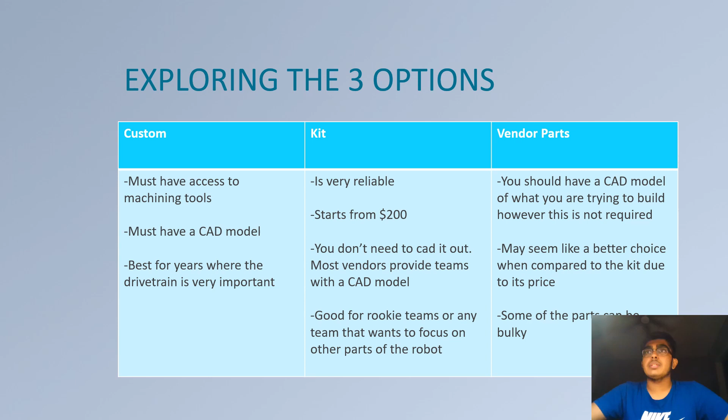So again, it depends on the game and it depends on your team strategy. If you want your robot to move in every single direction, mecanums or omni wheels are the way to go. Because with mecanum wheels, if you have one motor per wheel, you can control how the wheels rotate, and since they have the 45-degree rollers on the slant, you can literally move in every single direction, which is pretty cool.

And especially this season, where you're not going to have other robots on the field until maybe later on, like past January, this is going to be a really good option because you can't be pushed around because you're the only robot on the field. So essentially, if you want a robot that can move around pretty well, Mecanums are the way to go.

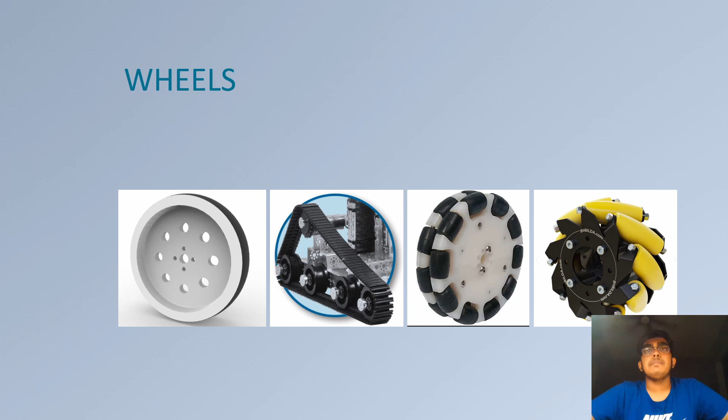And the thing with the tank treads is that you typically go slow with them, because you don't want the treads to come off, because then you can't move. I guess I'll move on.

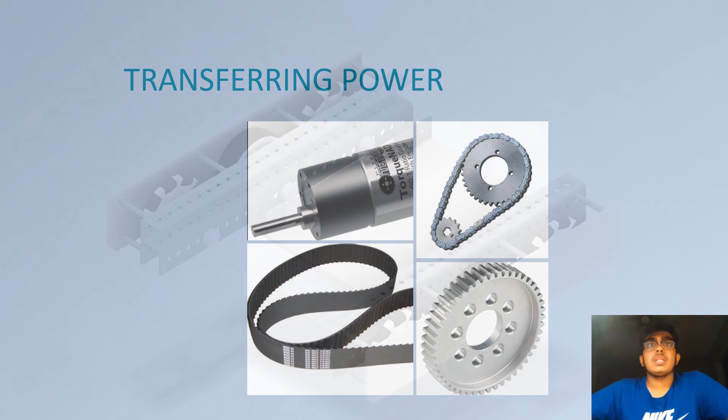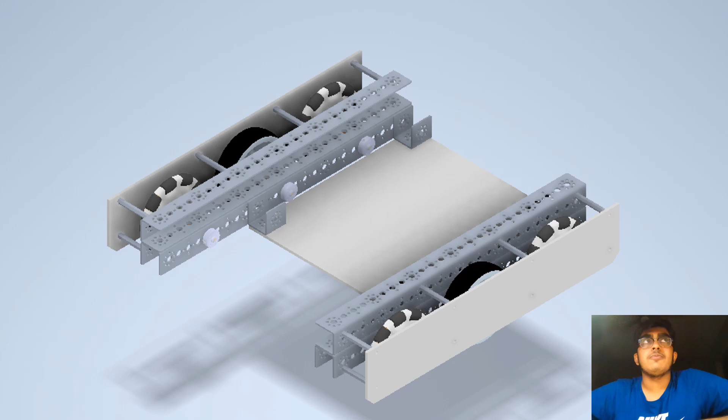So this is a drivetrain that I had created over the summer. It's pretty basic. Your middle wheel is the Tetrix traction wheel, and on the outside is an Omni wheel on each side, and the same thing for the other side. I probably should have put two Omni wheels, so a total of four Omni wheels per side, just to help.

And essentially, the one good thing about this drivetrain is that your turning radius would be the exact center, which is what I hope most teams would go for. It ultimately depends on your robot design and what you end up doing. But yeah, this is probably the most ideal way of designing a 6-wheel drive.

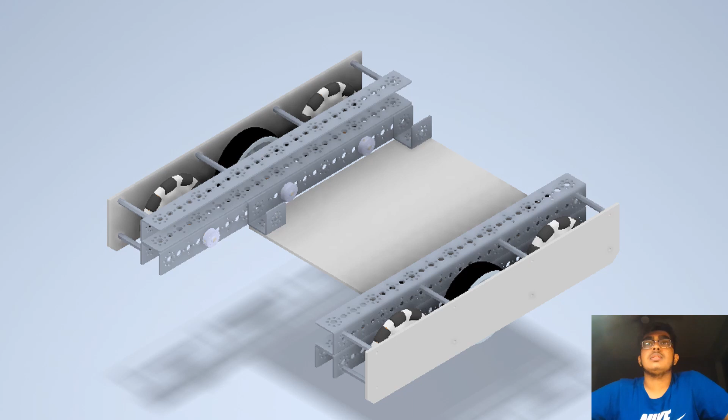And then if you wanted a normal 6-wheel drive, you can replace these outer Omni wheels with the same Tetrix wheels. Since they're the same size, you can just replace them and you'll have 6-wheel drive. The teams I've noticed that do the 6-wheel drive typically run their robot pretty fast, or they have it run pretty slow, but it's able to push other robots. So that's, I guess, more of a defense robot.

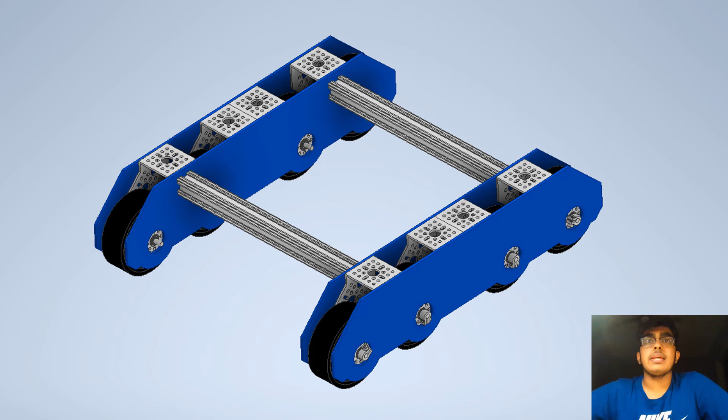Which most teams, especially the teams that go fully custom, try achieving. And it's really nice that goBILDA was able to design it like this. So, as I was talking earlier, this would be the mixture between fully custom and using vendor parts.

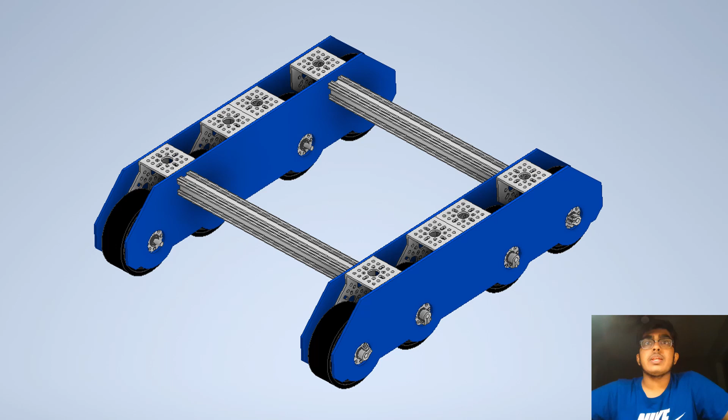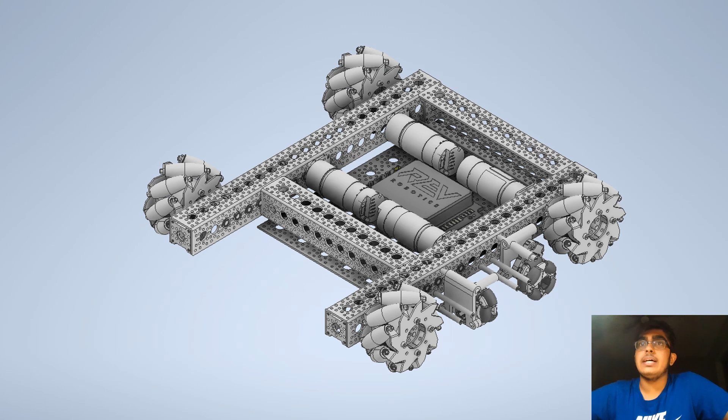So from the front motors, you're able to transfer power all the way to the very front, which is pretty neat, because then your entire front is empty, since you don't have any axles sticking out or anything like that. And yeah, so then this is the example of using the kit.

So this is the brand new goBILDA kit, their V2. They've had these planetary motors for a while now, but it uses their new miter gears, and it looks like they redid their mechanisms, and they look pretty nice. This is like the first time I've seen the new version of the chassis. And unlike the previous version, these are running a 1-to-1.

So I believe miter gears, by definition, are gears that run at a 90-degree angle. That means they have 45-degree slots on them, and they're essentially able to transfer power 90 degrees. So that's how they're able to fit these motors on the inside of the channel, and then transfer power to the shaft that's powering the wheel.